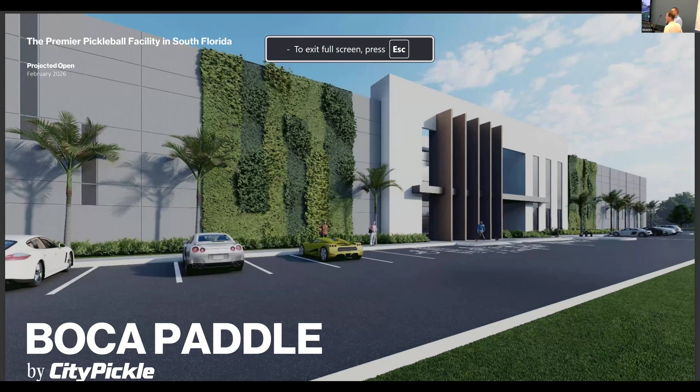So I'll let Stuart talk. Stuart loves doing this stuff afterwards, but no. A couple cool things actually - we had our weekly call and Brian Levine, our partner, is in Dallas and made it to the finals in the mixed pro split age, playing alongside Gabe Tardio, one of the top young pros in the country, against Ben Johns and Tom Dundon, the number one male pro in the country. Kind of exciting.

Pretty cool. And Steve reminded me, our operational managing partners, City Pickle from New York, are down here. They're opening up a pop-up - Steve Ross, the Dolphins owner, owns a piece of land in West Palm Beach at City Place, and for the next few months they've created a nice outdoor facility. They'll try to stay open until the end of April. Kind of nice to see our team really embrace the sport.

But anyways, we're here for a different matter. We just wanted to update you on Boca Paddle, where we're doing some renderings. It's short, there's really no input needed, just showing you what we're doing.

I was with Martin and Ludmila outside, and as an update, we believe jointly we'll have our plans ready - not only North Park civil for the park, but our civil plans for Boca Paddle - in for permit by the first week of December. So we're moving along. About 2 weeks ago we got our final approval from the city commission on some height variations, and now we're off to the races.

Anyway, so want me to flip through it? You've seen it, go ahead, we can talk and flip through it. The elevation's still the same, exactly. Let's see if I push the right one. So this is just giving a little overview - these are some of the newest renderings.

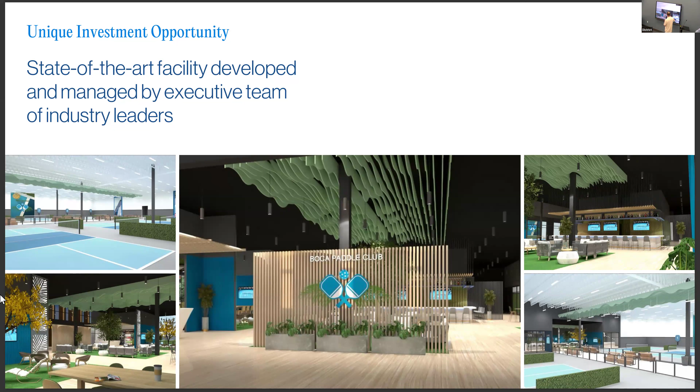So basically, when you walk in, this is sort of what the feel is going to look like. We're trying to keep this wood and earth tone type feel that's going to have a lot of green space and things like that.

This is going into a little more detail on the amenities we're going to have, and reiterating some of our targets and the tournaments and events we're going to have.

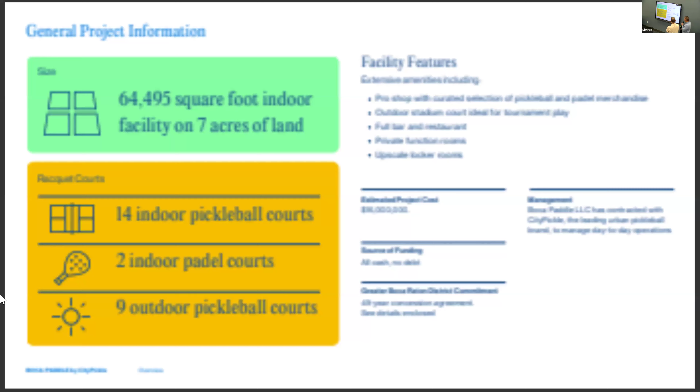Just as a reminder, we have almost 65,000 square feet of area on 7 acres, 14 indoor pickleball courts, 2 indoor padel courts, and 9 outdoor courts. So that's more to refresh everyone's memory on what our facility is. Again, we're going to have the pro shop, the bars. The cost is 16 million. And of course we have the management team of City Pickle.

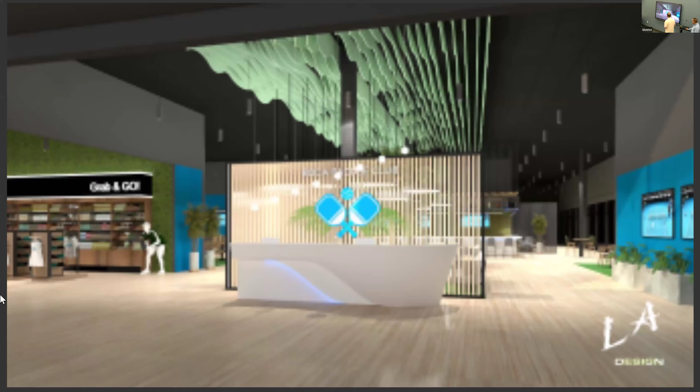So it's a pretty open feel, but definitely with earth tones, trying to feel pretty warm with a lot of green space, keeping things as open as possible. Off to the side there is the pro shop, grab and go, and all of the retail area for sale.

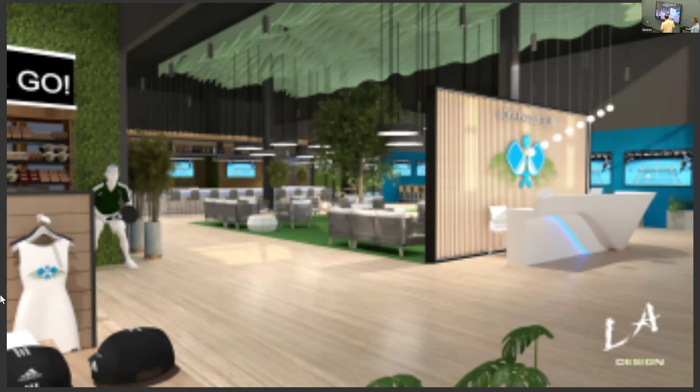It's now you're standing inside the pro shop looking towards the back. Center area here for gathering and eating, bar in the back. You're standing in the pro shop back over here, reception still at the front, TV screens and stuff like that.

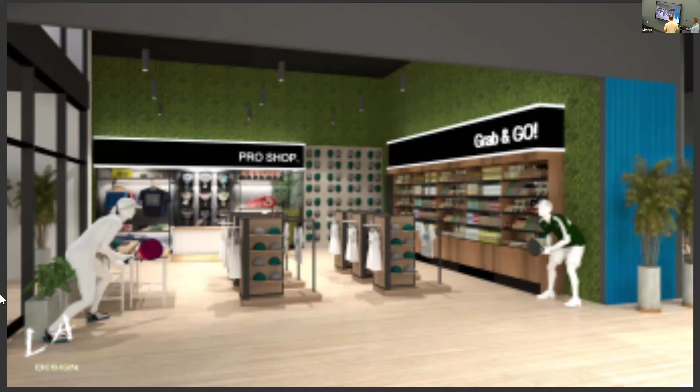Moving forward, looking into the pro shop where retail goods are, and then grab and go food and drink and beverages and whatnot.

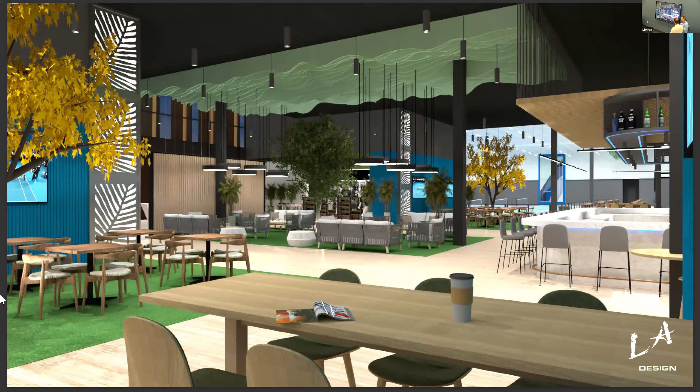One more shot from a different angle. I think one of the keys we were working on with Linda Allard, who's also a Boca designer, was we wanted to kind of bring that outdoor feel inside - a little bit more of an organic, park-like setting, not too cold. You'll see a lot of the trees are going to be artificial trees, of course, but we wanted to create that park-like setting while bringing it inside.

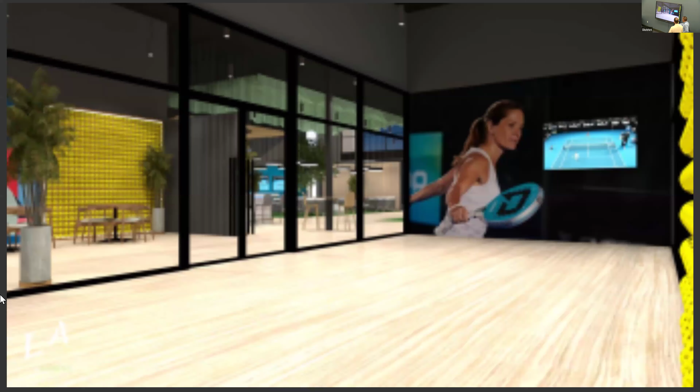Just more of a zoom in of one of these multi-purpose party rooms, from another angle as well on the other side. That's the hallway leading from the bar out towards the outdoor area, and the party room is on the left.

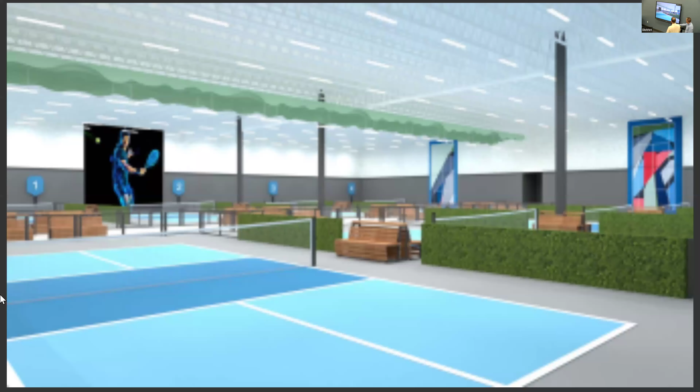This is the feel we're looking for with the courts. There'll be fencing, most of it 4 feet tall, but we're also going to try to cover some of the fencing to keep a cleaner aesthetic. You'll have a pass through on either side of these benches, a small path for people, but hopefully we'll block out most of the balls, keeping them in that area.

Keeping with this theme of the outside-inside park organic feel, there's some green wall and fence elements we're hoping to do, along with this wood aesthetic benching.

There's a couple other angles we have here to show you. And remember, it will be about 24 feet clear to the bottom of the lights and the bottom of the rafters.

And we think we'll have murals on the wall, we haven't finished it yet, but some of our executive team, some of the top pickleball players in the world will probably be signed on here soon. We'll make an announcement over the next couple months. I think there'll be professionals working out here, regulars like myself, experts like Stuart, and just ordinary people.

I think it's going to be a really, really cool benefit for the community. I think that might have been the last slide. That was it, yeah.

I like the aesthetics that you guys are showing us here. I think it gives it a really warm and friendly and inviting feel. I like the green, is that an acoustical thing on the ceiling? Yeah, so I saw that in the main area and in here. And I like the wood, I think it looks great.

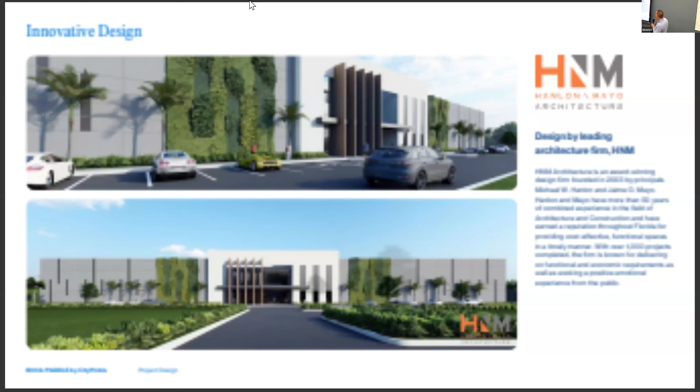It's only if it's big events. So we were thinking when we do have larger events, we could go back to the floor plan. We have these four party rooms that actually open up into the court, so we thought we could always lose an indoor court, put an artificial floor covering over the court, and have that as the party area. I think it would become more interactive rather than having this big separation upstairs and downstairs. It seemed cool to overlook, kind of sit there and maybe watch people.

But it became a little problematic too, in terms of having two kitchens. As we started digging into it more, Craig, we saw it creates some interesting issues with the lighting, in terms of how high you've got to go, because the building would have to be higher - that also relates to the HVAC and things like that. So by getting rid of the mezzanine, we drop the ceilings down a little bit, build a lower building, have less energy costs, and have easier ways to do the lighting for the courts and things like that.

So what is the height of the building then now? Is it 24 clear inside, and I think we're about 29 total, I believe. No, with the bar joists and everything, with the parapet wall, we're probably like 30-something feet high. Okay, and previously it was 8 feet taller. Yeah, 8 - oh, that's not much.

So then I noticed in the picture there's a lot of columns - those are columns supporting the roof, I take it? I think there's some, I don't know if you could see where the columns are there. There's three columns basically, right? Okay.

So it's a joint construction. We have a column here, column here, and column here. We tried to do everything we could to keep the columns out of the sight lines of play, but also future-proof the building if we ever had to turn this into an indoor volleyball or something else.

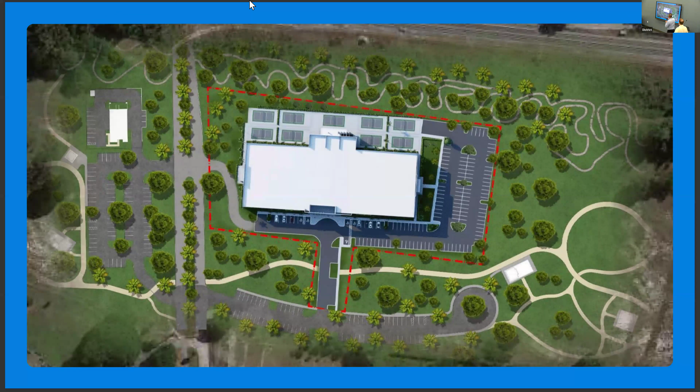Yeah, so I think what we're going to do here is, this area bumps out because of the bathrooms, so this will be an outdoor covered area. We'll probably have something like a pergola, a louvered system, where you could open it up or have it covered if it rains.

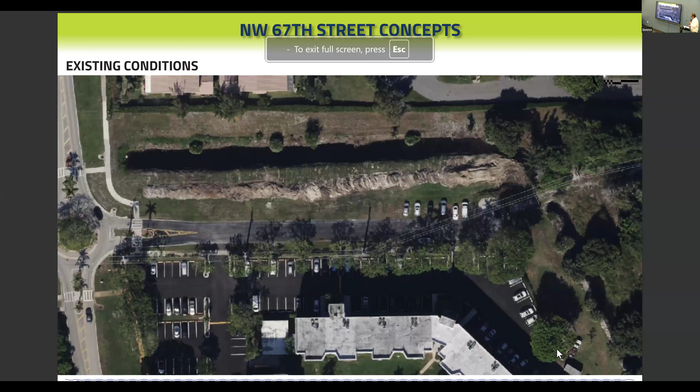All right, so we just wanted to give you an update on where we are in the process, because there's a lot of different processes going on with a project of this size. Tell the record who you are. Oh, I'm sorry, Mike Kroll with Miller Legg.

So first, from a permitting perspective, DEP gave us concurrence on groundwater issues last week. One of the nice things about that is now we're able to finalize the strategy on how we're going to handle stormwater in the park. The approach we're taking is low impact design, utilizing a series of bioswales that run through the park and treat the water before it outfalls into the canal on the east side, improving water quality before it leaves the park.

The other thing is it allowed us to reduce almost 95% of the exfiltration trench that we were going to put in for drainage, and that's really important because that's $200 a linear foot. So we're looking at ways, waiting for agencies to give us a little direction, so we can come up with the most cost effective but also ecologically responsible designs for the project, because we think that's very important.

So that was something we were able to do. Now that we have that, we can finalize the drainage plans and all the engineering plans. Our goal is the 1st of December to have a package ready for submittal to the agencies, both South Florida as well as the city, to get approvals on that.

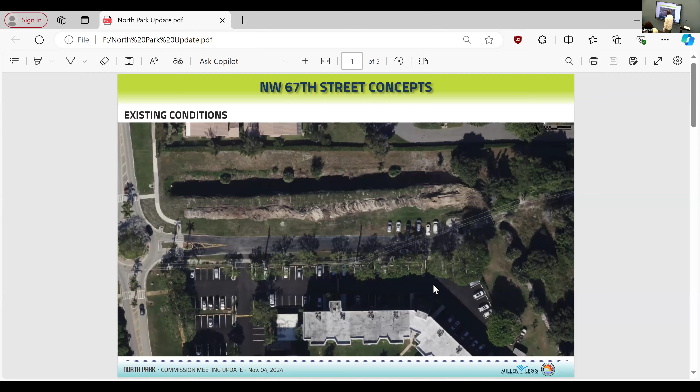So no one will ever need that. I just want to make absolutely sure. Well, you can't leave it flat if you want.

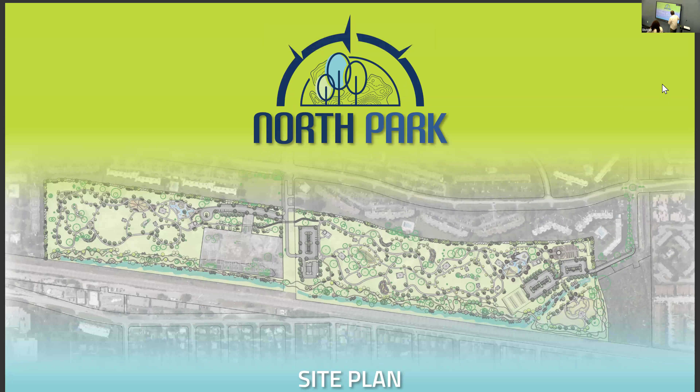But right here, so this is 67th and this is, so north is this way. Here's the circle, come in, come in here, come in here. And then these are actually paved parking lots here.

This parking lot is grass, so it's just going to be stabilized so when we have events or if there's a necessity for overflow parking, it's going to just have probably a split rail fence around it. And then we'll be able to open the gates up right there and cars will be able to park in that location.

That's good, because that's what happens at Sugar Sand. Every park gets overrun somewhere. It says little overflow. That's really well thought out. Thank you, I think it looks great.

So, Malcolm's building also, we share parking.

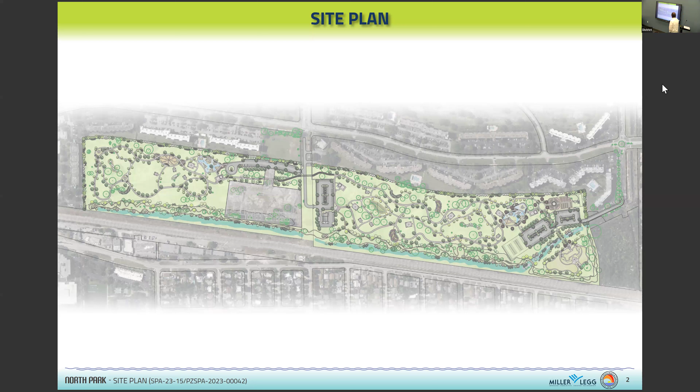Can you go back to the concepts again? Because do we have to vote on that tonight? If you could, yeah, or it would help, at least if it was narrowed down to a couple or something, at least give us some direction. We have a meeting with the city on Friday and we're gonna see what our constraints are realistically, but we wanted to kind of have your feedback already to see the preference from the district, and we can work out those kinks.

Isn't there only one option with the two sidewalks, and that's B? Well, is that sidewalk though absolutely necessary? Because you have to cross over anyway, right? So it's not necessary, it's a desire, it can be put there. Again, that's why we wanted to show all the different concepts, it works with just one sidewalk and a crossing here. But if it's more comfortable for people to walk in that way and then do a crossing here, then it works for concepts C and D.

I kind of like the idea of more green space when you're driving in and the bigger trees and the sign in the middle in terms of symmetry for me. I like the aesthetic of that better. And in terms of the drive, the curve, that was the difference between C and D, correct? I can't visualize that.

So in terms of your recommendation, what would you recommend on that? I mean, I think this one is better because it's more symmetric, but...

Yeah, but I think the other thing with the wiggle in it - so I can go to the next one. When we talk about reducing speed, anything that's not as straight a line is going to reduce speed. And even if we had to introduce something here, just rumble strips or something like that. Like I say, if it's straight, it's a raceway. So any kind of little chicane or movement in the road that you can introduce, it helps reduce speed.

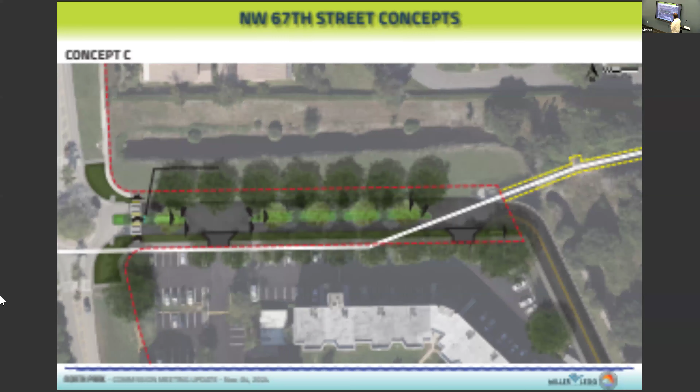Does it still work on concept D for the fire truck. Yeah, fire trucks work on all of the concepts.

On that one corner, where if you go with B, where that sign is, are you guys gonna be removing or relocating FPL, all those things that are on that corner?

A neat thing we learned when we got the survey for that corner, and something we're going to be working on with Brianne, is that the actual right of way is currently planted with a hedge that the condominiums have. So if we really were to take that up to the right of way property line, we would have enough space and there would be no issue with the FPL pole.

Because there's like a few things there - a couple of big boxes there - but all those things kind of fit.

If we can regain what is rightfully the right of way and put that pedestrian path in behind that pole, we have adequate space. Because when you look at it right now, it's really tight against that signal pole.

ADA accessibility path currently out there - there is a small path there, but it likely does not meet ADA.

Just to reiterate, placement of the gate is the same for every option. Also, you just brought up ADA - will the number of sidewalks, whether we do one or two, have any impact on ADA? No, as long as we have an accessible route, it will be fine.

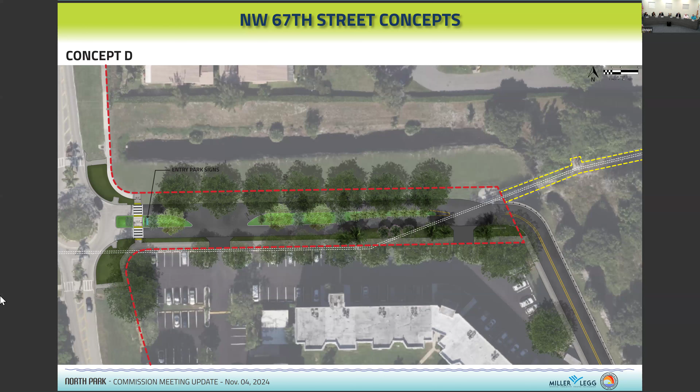Okay, moving on to number 3, the 2025 district meeting schedule. Commissioners, in your agenda packets on page 7 is the memo and the calendar of dates for next calendar year. It includes the addition of the day after Thanksgiving as a holiday. Tonight I'd like to get two separate motions: one to adopt the schedule for the 2025 calendar year, and another separate motion to add the day after Thanksgiving to our current calendar year in alignment with the city holidays.

Move that we adopt a board meeting schedule as laid out in this memo. Second. Any further discussion? Commissioner Ernst, yes. Commissioner Engel, yes. Commissioner Rollins, yes. Commissioner Vogelsang, yes. Commissioner Wright, yes. Motion passes unanimously.

Can you also make the day after Thanksgiving this year a holiday? That was my separate motion. Second. I move to approve holiday closings as laid out in the memo, including this year, which is Friday the 29th, the day after Thanksgiving 2024. Second. Commissioner Ernst, yes. Commissioner Engel, yes. Commissioner Rollins, yes. Commissioner Vogelsang, yes. Commissioner Wright, yes. Motion passes unanimously.